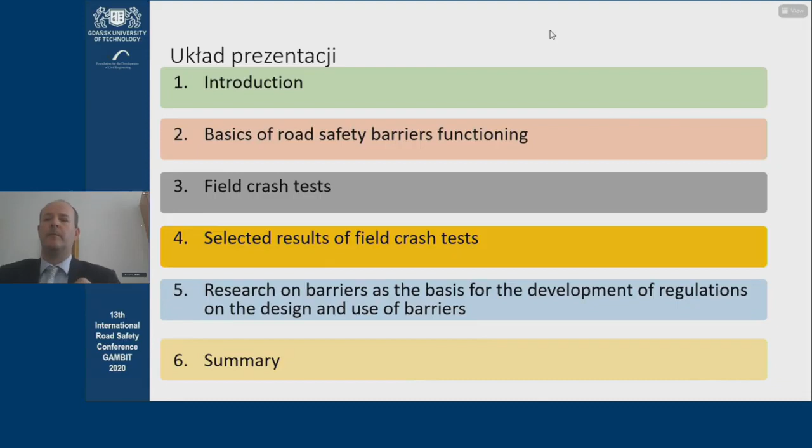I'll start with some basic discussion of road safety barriers and how they function. Then I'll describe the field crash tests, which correspond well with the previous presentation. In order to run numerical analysis, we always have to run appropriate field tests first, so there will be some selected results from the field crash tests. Finally, I'll discuss how those results can be translated into the principles of using road guardrails.

What was said before by Professor Witkowski indicates that the investigation of guardrail barriers was done under two separate RID projects. One was for road safety equipment, and the other concerned the effects of time and operating conditions on the functionality of the same road safety equipment. Now, what are the problems we face?

When we look at road guardrails, we're talking about safety in the vicinity of roads and heavy traffic. As Professor Gaca discussed, we always have to use guardrails to protect persons in the vehicle from what's outside the road. But we also need to design roads so that we do not need guardrails. If there is no other way, of course, we should use guardrails.

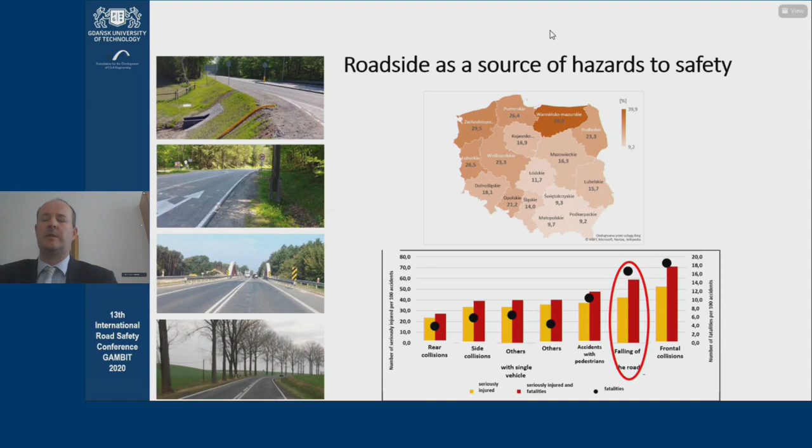Unfortunately, these are still very common on our road network. On the map you can see the percentage share of lethal accidents by region, by voivodeship. This is usually related to trees growing close to the road shoulder, but also other factors. These accidents related to the roadside environment are practically right next to head-on collisions. You can see that the next most common cause after head-on collisions is falling off the road on a curve. The severity of these accidents is usually very high.

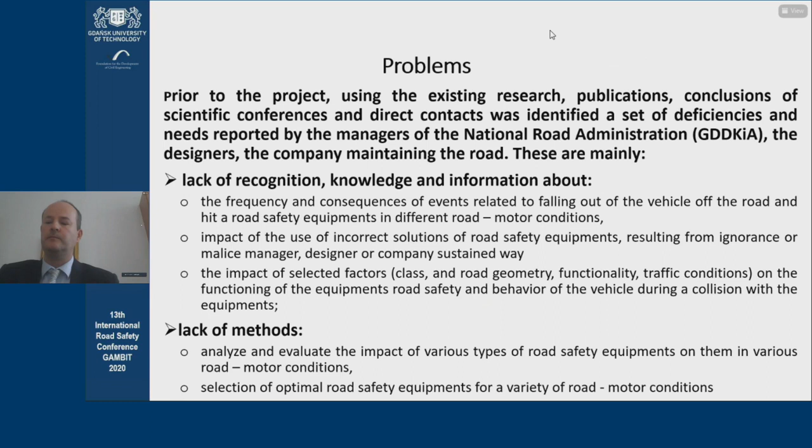When we originally started doing research under those two projects dedicated to road barriers, we found there was a need for tools for designers and for people who maintain safety infrastructure. We're lacking tools that would allow us to evaluate the consequences of collisions with those elements for safety. We also needed tools to evaluate how these safety measures affect the behavior of vehicles at impact, and tools that would allow us to evaluate whether those safety measures maintain their functionality.

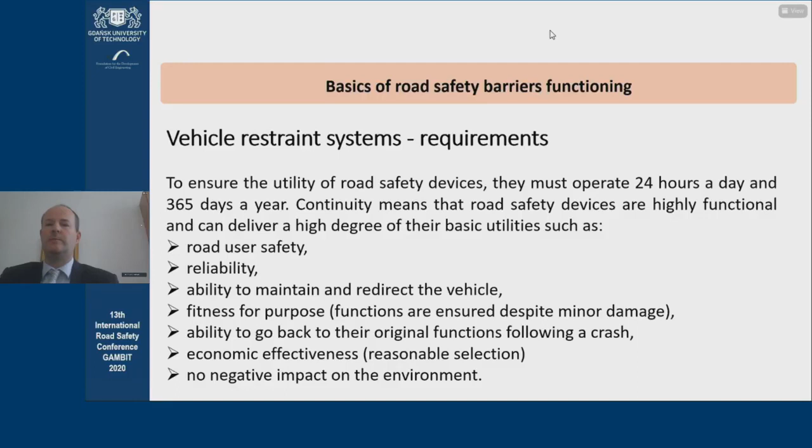If we impose certain requirements and expect certain features from road safety barriers, then the key issue is functionality, the usability of these devices. It must be functional at all times, and this is of key importance. We need to ensure continuity of operation of these infrastructure elements, and this functionality is defined by safety, reliability, effectiveness, and the ability to keep, maintain, and redirect the vehicle. The effectiveness has to be economic as well.

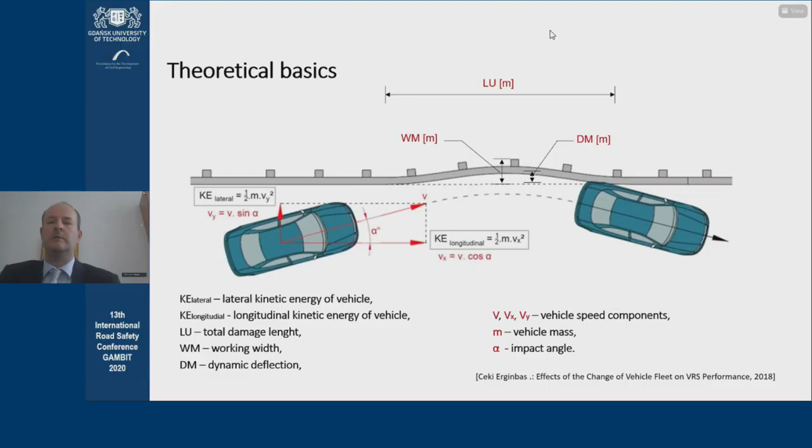It should also not impact the environment in a negative way. When we look at the theoretical basis for the functioning of barriers, it is based mainly on kinetic energy - at the moment of impact, when there is a crash, it all depends on the kinetic energy, which depends on the mass of the vehicle, the angle of impact, and the velocity with which the impact occurred.

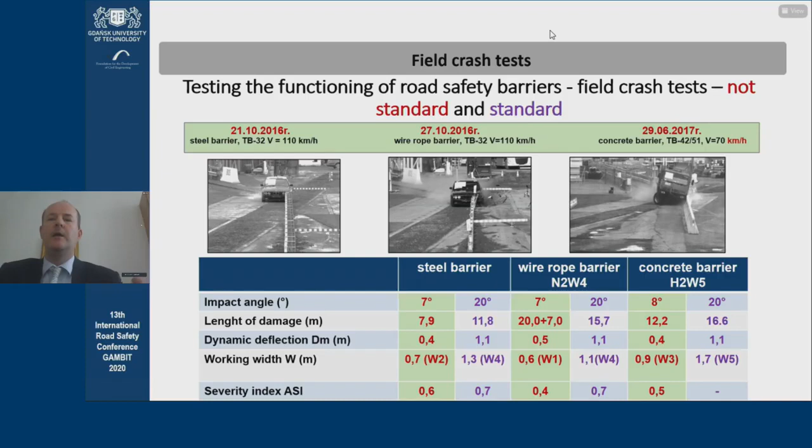Looking at the detailed analysis of the selected tests, 9 of the tests were carried out under the 3A segment of the project. In the picture we see just 6 of them because 3 of those tests were implemented as repeat tests.

It's the situation that was discussed in the previous presentation. What was done in those 3 tests was that there was a second impact into a damaged barrier.

So we tested rope barriers, steel barriers, and concrete barriers. These were located on a curve without any inclination. There were connections between a wire rope barrier and a steel barrier. There was a test with a short bridge barrier.

That's one of those tests with a lightweight vehicle, where we mainly tested G force inside the vehicle. And we hit the same barrier later with a bus.

And a very interesting test, we put in a lighting post in the barrier, and as a result, as you can see, the safety measure of the barrier, that is the bottom right picture, did not work properly.

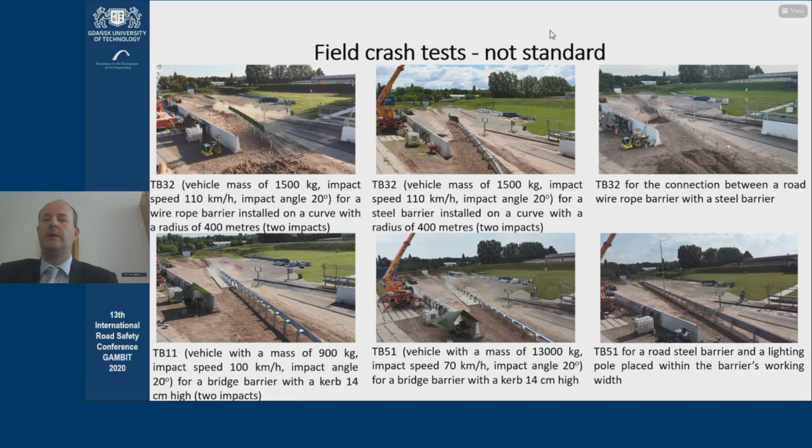These are the tests that were carried out as part of the project, and based on these tests, reports were made.

And from those reports, you could gather a lot of information about how the device behaved, how the vehicle behaved after hitting the barrier, and we also looked at the various parameters that really determine the functionality of the barrier.

So dynamic displacement, the length of damage, the number of damaged posts, segments that needed replacing. We also looked at

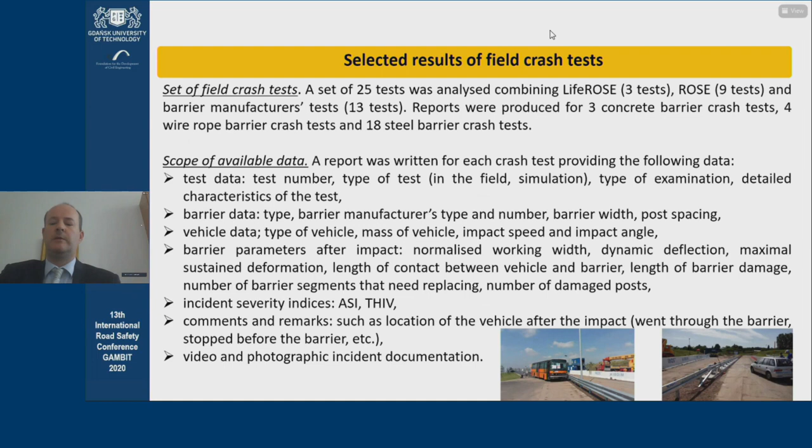the severity of the incidents, of course ASI and THIV documentation was prepared. And of course, we compiled photographic and video documentation.

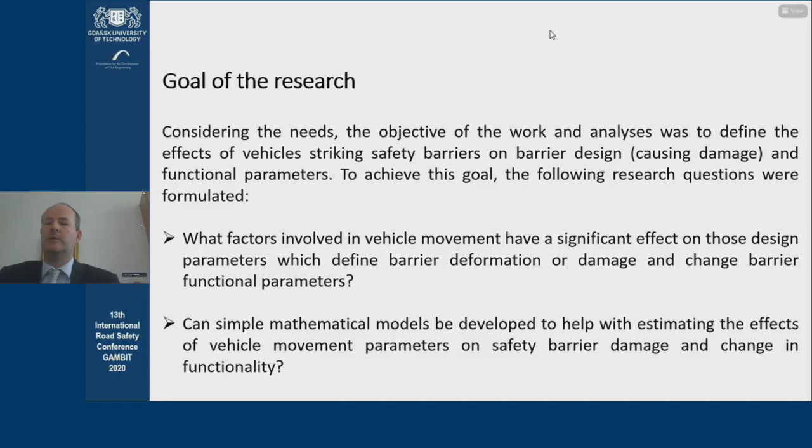The second question is, can simple mathematical models be developed that will allow us to easily estimate the effects of vehicle movement parameters on the type of damage and functionality of barriers?

Here are some of the selected functional parameters and barriers that we analyzed. First was the lateral kinetic energy, the basic factor, and how it affected barrier deflection, barrier resistance to that deflection, so the stiffness of the construction, defined by a formula in which you have the vehicle weight, velocity, angle, and dynamic deflection.

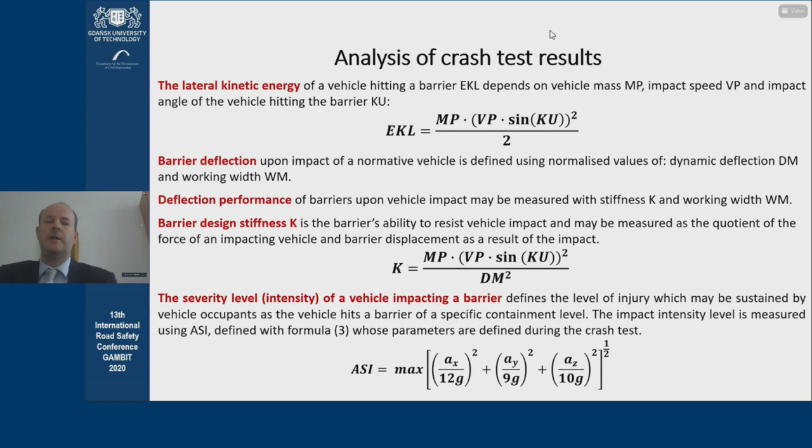Also, you have the analysis of the severity index, or intensity of impact level. This is a very important parameter, because devices which do not achieve the required value of that parameter cannot be permitted to be used, because they constitute too much hazard for the persons inside the vehicle.

Here's an example of an analysis looking at dynamic deflection. It characterizes what the barrier does on impact.

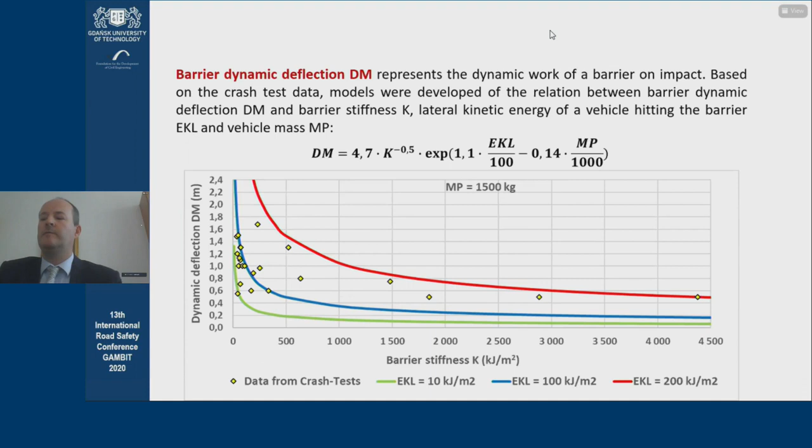There's a relation defined here, so what does dynamic deflection depend on? It's barrier stiffness, lateral kinetic energy, and vehicle mass. You can see that dynamic deflection increases as lateral kinetic energy increases, and it decreases as barrier stiffness and vehicle mass increase.

Next parameter, barrier working width. This is a parameter which really characterizes barrier stiffness, or its flexibility to vehicle impacts.

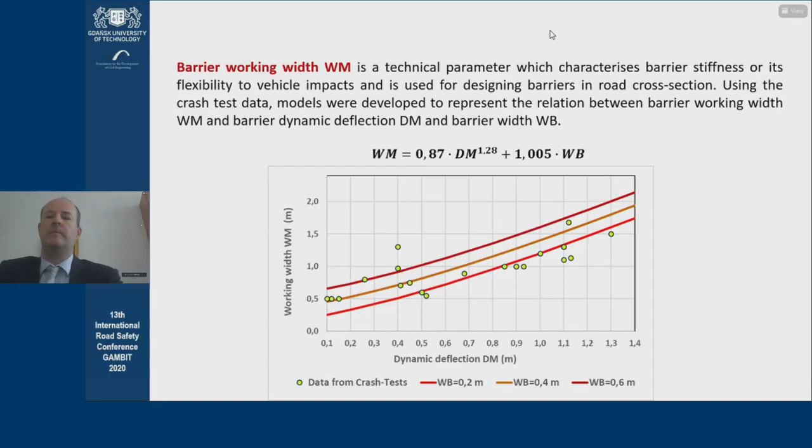And again, we've defined the relation between barrier working width and dynamic deflection, and so as working width increases, dynamic deflection goes up, as well as barrier width.

And finally, the severity level, ASI, which is its relation between lateral kinetic energy and dynamic deflection. ASI increases as barrier stiffness increases.

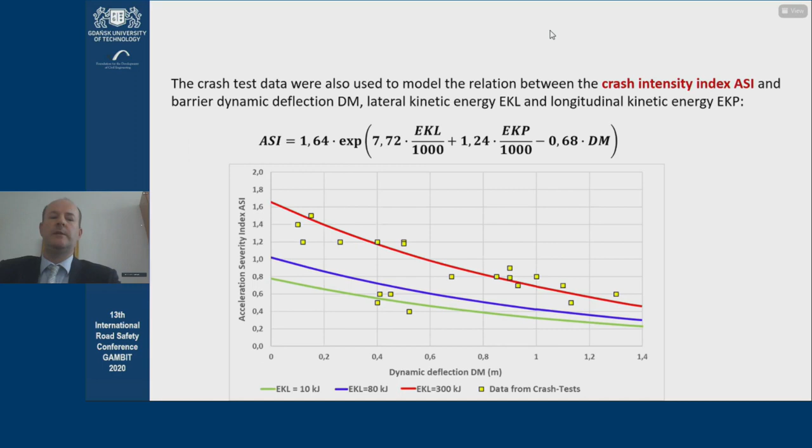And this is a crucial point here. So what I'm presenting you is just bits and pieces of the results. But how did we use the results to formulate regulations?

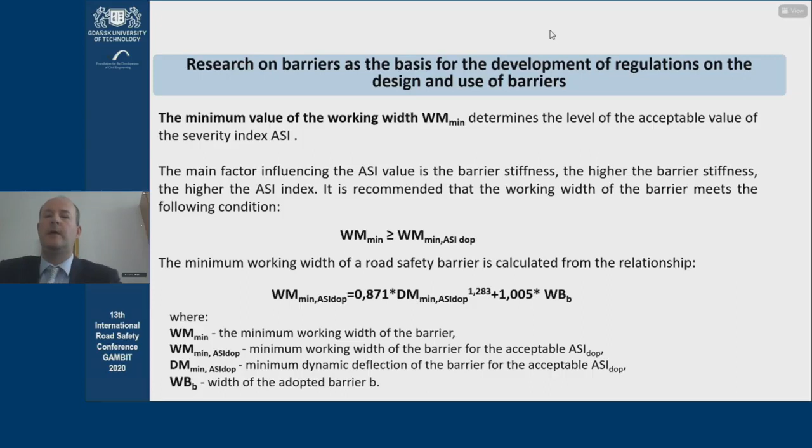Here's an example of how minimum working width should be defined, via dynamic deflection and the width of the barrier itself.

And there's another thing here, which is how we should identify or pick containment levels. This is based on the risk of the safety barrier being penetrated.

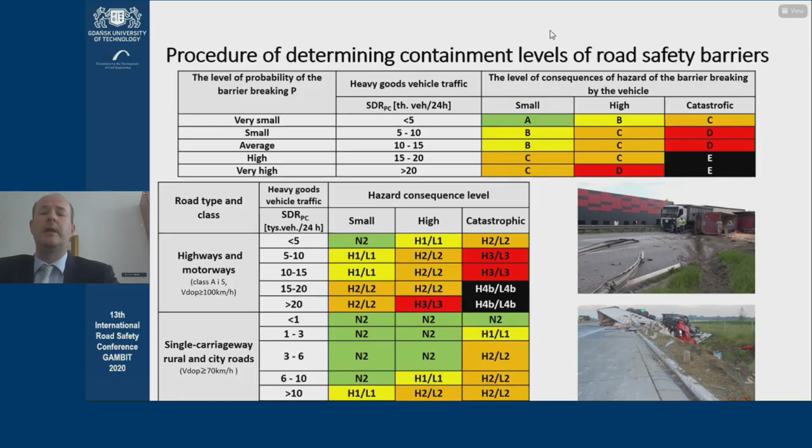You can see some photographs of that here. And in the table below, you can see how containment levels should be defined, and that depends on the expected consequences of accidents, roadside accidents, and that in relation to road class and volume of heavy traffic.

So finally, the study was based on crash tests, and then we added numerical studies to complement the work. And what we know based on this is that it really makes sense to study these elements, because the severity index increases as barrier stiffness increases. And working width and dynamic deflection depend on barrier stiffness and kinetic energy. So these are the findings.

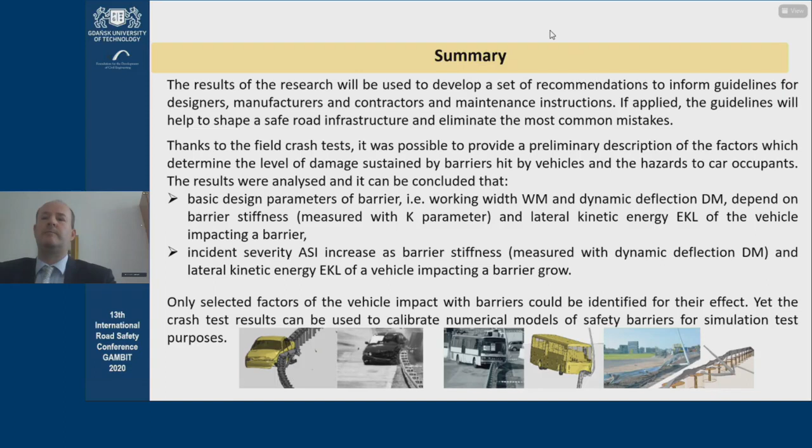One other finding is that field crash tests are really key, because that way we can study or understand the basic parameters. But obviously crash tests cannot possibly cover everything, and so we need to expand the analyses by adding numerical studies, giving us a much broader view of how a barrier operates on impact. Thank you.